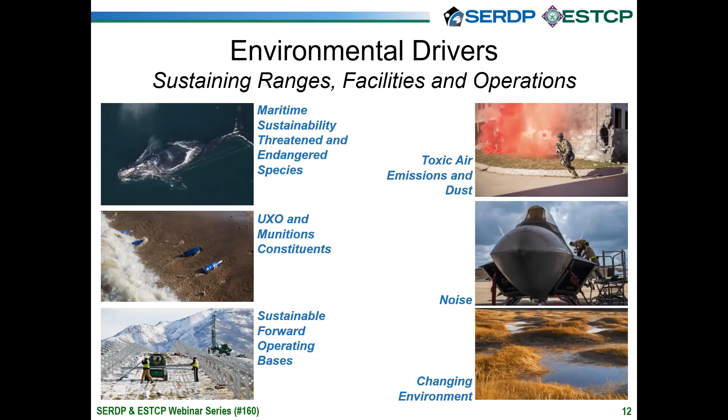We also are looking at reducing current and future liability. That can take the form of pollution prevention, where we're looking to eliminate hazardous chemicals of concern, or materials or processes, at our installations.

And then also we're looking at impacts from past practices. That could be impacts to our groundwater, soils, or sediments, and it includes some of our legacy chemicals of concern, as well as some of the emerging chemicals of concern.

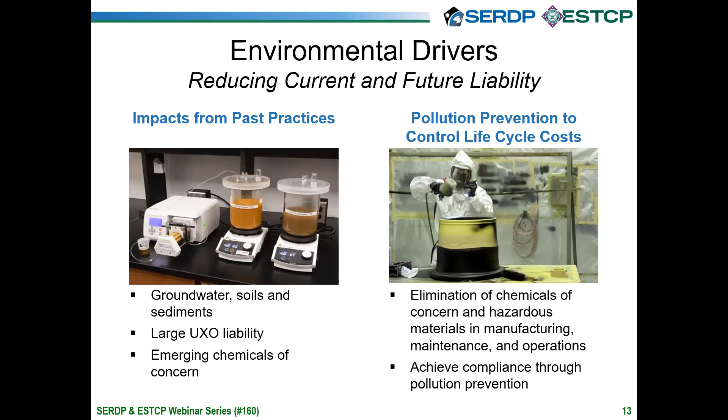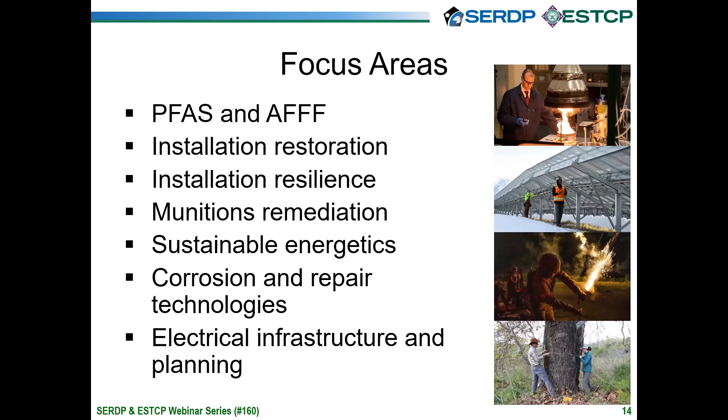Both of our presentations today will fall under this issue of reducing current and future liability. We have a number of focus areas, and you can see from this list they're pretty broad, everything from the top at PFAS and AFFF, down to electrical infrastructure and planning. Today our presentations will be addressing PFAS and AFFF.

The bedrock of our program is really on technology transition, and that is very critical to getting out the word on these successful technologies that we're funding under SERDP and ESTCP. We do this in a number of ways. If you go to our website, you'll find videos, guidances, and manuals on how to do things. We have an EnviroWiki that gives summaries of various different types of technologies. And then key to all of it are these webinars that we're watching today.

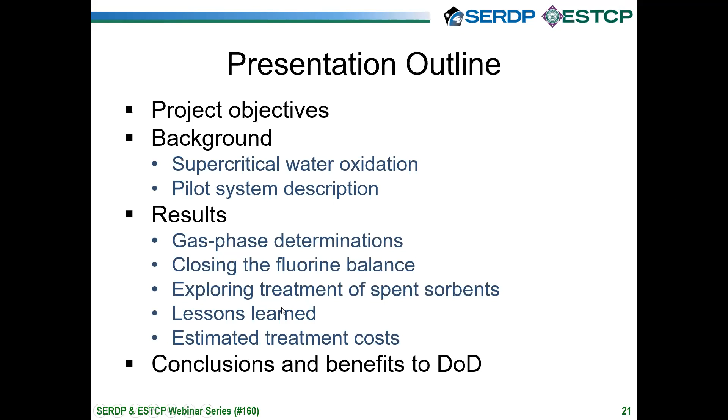This is the outline of my presentation. I'll go over project objectives, talk a little bit about background, explaining what supercritical water oxidation is, and describe our pilot system that is at Duke, and then go over the results, show you some detailed results, in particular closing the fluorine balance, and exploring other matrices, and wrapping it up with lessons learned, as well as estimated treatment costs.

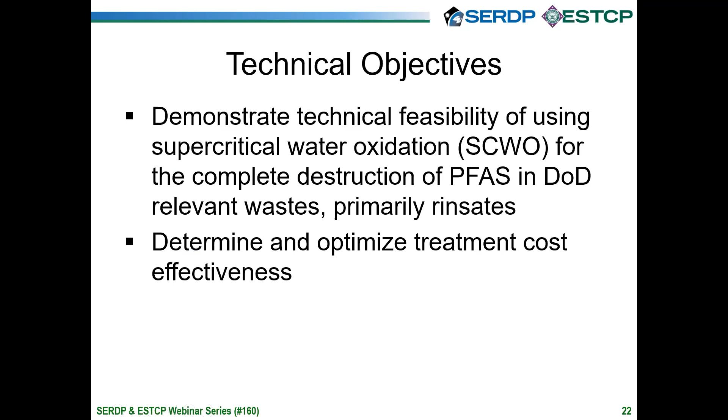The technical objectives for our ESTCP project are to show the technical feasibility of using SCWO for destruction of PFAS. We're focusing primarily on rinsates, but I will show you some results as well on other matrices. Then we determine and optimize treatment costs, have a determination of what it means at scale, and also prepare for technology transition.

So the demonstration elements include both treatability with a pilot, as shown here on the screen. This is our pilot SCWO system, doing some techno-economic analysis studies for understanding what the costs are, and technology transition activities. A lot of these are going through 374Water, but also we have an EnviroWiki, and have been very open about publishing and presenting.

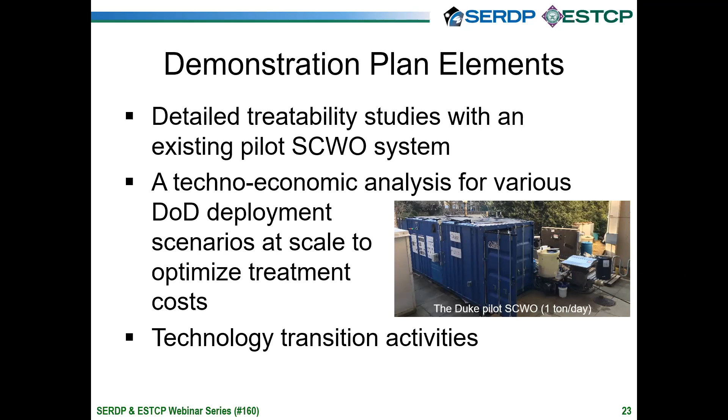So what is supercritical water oxidation, and what is supercritical water? We're all used to think that water comes in three forms: liquid, solid, and gas.

It turns out that if you heat and compress water to the extreme, above 374 degrees C or 705 degrees Fahrenheit, and roughly 220 times atmospheric pressure, water becomes supercritical. What does it mean? Well, it is neither a gas nor a liquid, but it borrows very interesting properties of both. It's semi-dense, has a specific gravity of roughly 0.1 to 0.3, and is extremely rapid heat and mass transfer water. But also it is a very reactive medium.

And what that means is that if you inject oxygen or another oxidant in supercritical water, the organics are going to be reacting really, really quickly, in a matter of seconds, and be oxidized to their most stable elements.

So the attributes of supercritical water are listed to the left here. Get very fast reactions. We mineralize all contaminants to CO2 and stable elements, and we call it waste agnostic. That means we can treat all kinds of co-pollutants, solvents, surfactants, chlorinated co-pollutants that come with the waste are all going to be oxidized without the formation of byproducts. We're not producing a secondary waste stream. And we can treat both liquids and we can treat slurries.

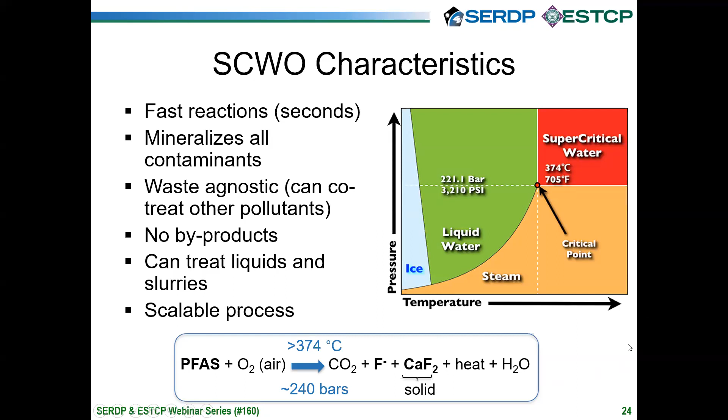Starting in 2013, the Gates Foundation funded a program in my lab to look at supercritical water oxidation for the destruction of fecal sludge in developing countries. And then much later, we realized it can destroy all kinds of pollutants, and this is when we did some trials with PFAS, and then later got ESTCP.

It is a continuous treatment system. Can treat about 1 ton a day or 265 gallons a day. As I mentioned, it uses air. It's a lot safer than pure oxygen, and it's fully computer controlled.

We have acquired a lot of expertise handling slurries, and that comes in handy with treating all kinds of waste, in particular suspension of ion exchange and GAC, and I'll show you a little bit more during my presentation.

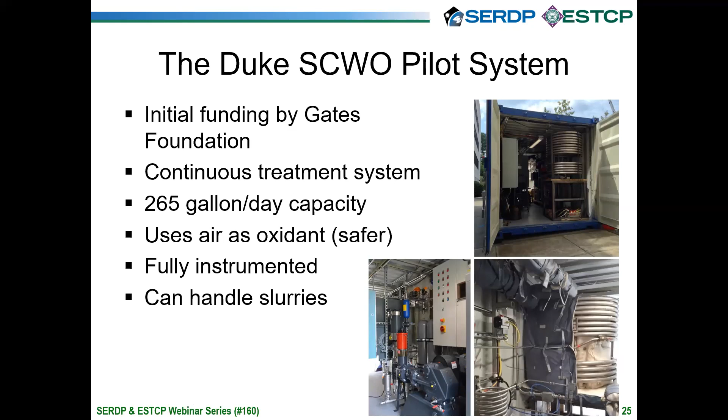And then within seconds, the supercritical mass travels through the reactor, which is just a long tubular reactor. The temperature increases, and all the supercritical water oxidation reaction happens. The treated waste is then cooled through successive heat exchangers. There's a final cooling, and then phase separation, like the permanent gases and then clean water effluent.

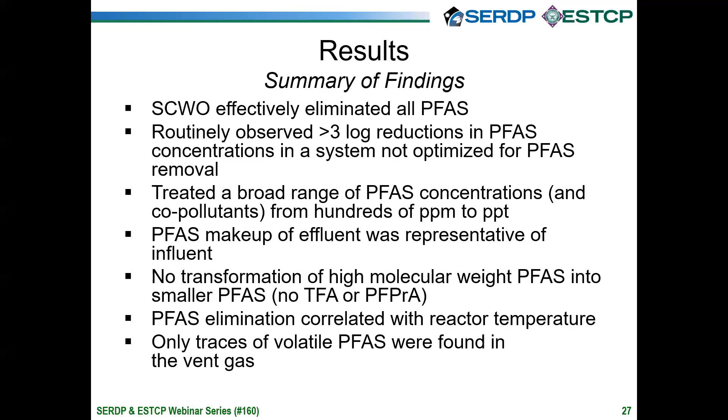There was no formation of HF. We control the pH in our system, and fluorine stays as fluoride in the liquid. There was no CF4. There was only traces of a few volatiles, and they're listed.

Pentafluoroethane being one, perfluoroheptane being another one, but the concentrations and the mass flux were really low. These were traces. In particular, I'm putting this number here, 0.2%. This is the fraction of the organofluorine that was fed to the system that was recovered or that ended up in the gas vent.

I stress here the fact that this is in a system that was not optimized for PFAS. So, thinking into the future for a system that will have a longer reaction time and further optimization for PFAS treatment, this number is likely to go further down.

I think this allows me to say with confidence, and we have the data to prove it, that SCWO does not emit significant amounts of volatile PFAS.

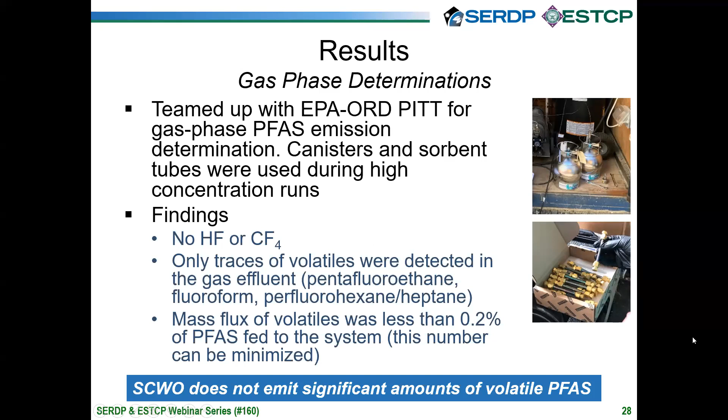I want to show you in the next few slides the proof that we're mineralizing the organofluorine to inorganic fluoride. We attempted to make fluorine balances on the larger system, but it was very difficult because there's a lot of nooks and crannies where fluorine, in particular precipitated calcium fluoride, can hide.

Therefore, we turned to a lab system. In the lab system, we call it the mini SCWO, is simply a high-pressure pump, a tube furnace, and the reactor in that furnace. We use an isothermal condition, and then cooling, and we can capture everything that leaves.

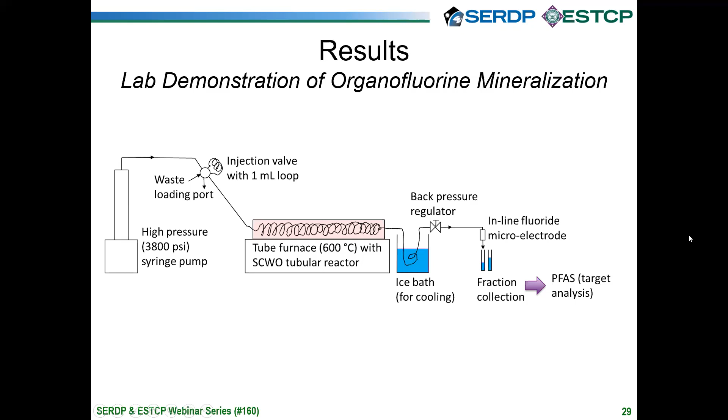Our approach here is to make injections of selected PFAS species, generally single species, and measure the fluoride coming out and compare the inputs and outputs. We can use this system as well for kinetic determinations to understand the kinetics of destruction of the specific PFAS.

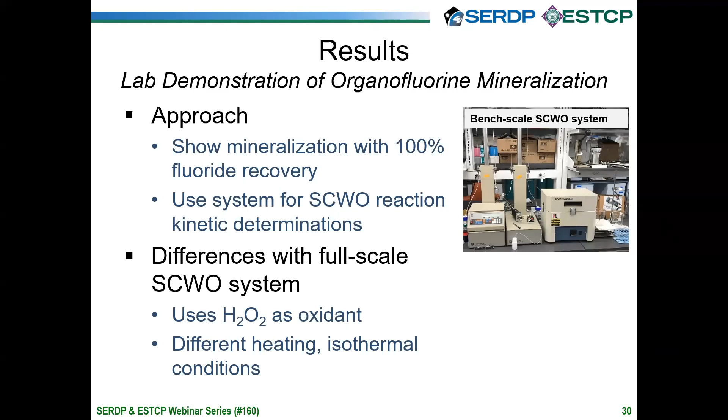There are differences, though, between this lab system and the large-scale system. In this small system, we use hydrogen peroxide as oxidant, but the hydrogen peroxide with temperature gets converted to oxygen and then acts. There's also slightly different thermal management and temperature profiles, so as we think about what these results mean for the larger scale, we need to be able to reconcile things such as reaction time.

Here's a typical result that I'm showing. I am reporting something we call the PFAS mineralization. It is the ratio between the fluoride that we recovered, the mass of fluoride, divided by the mass of fluorine in the PFAS injected. So when this is 100%, it means that every PFAS that was injected, every fluorine atom that was injected, is recovered as fluoride.

This experiment shown here is for 1 ppm PFOA at a constant temperature of 600 degrees. As a function of reaction time, we are reporting PFOA mineralization. What you can see, as we could expect, is that with increased reaction time, we're increasing the mineralization, and there's a point at around 35 to 40 seconds where we get 100% recovery as fluoride.

It's interesting that at the point where we don't have 100% mineralization, we also non-detect for all target PFAS that we analyze through our targeted analysis, about 40 compounds. No TFA, no PFPrA. What's probably happening is that we decarboxylate PFOA and produce perfluoroheptane, which is non-soluble and probably ends up in the gas phase.

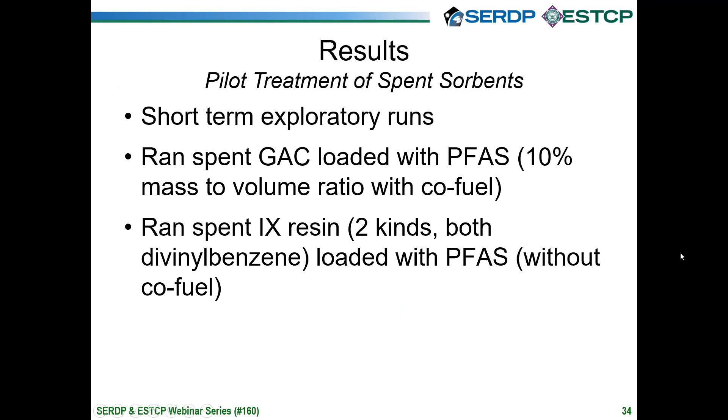I want to show you some results of the exploratory treatment of spent sorbent, because sorbents play an important role in treating, say, drinking water or low concentrations. These were short-term exploratory runs that we did, and we treated both granular activated carbon that was spent, so it was loaded with PFAS, and different kinds of ion exchange resins. Both of these were divinylbenzenes. They were all loaded with PFAS.

I want to be very clear here that we're not talking about regeneration or reactivation. SCWO fully destroys the resin or the GAC. So this is good for single use, and not reactivating.

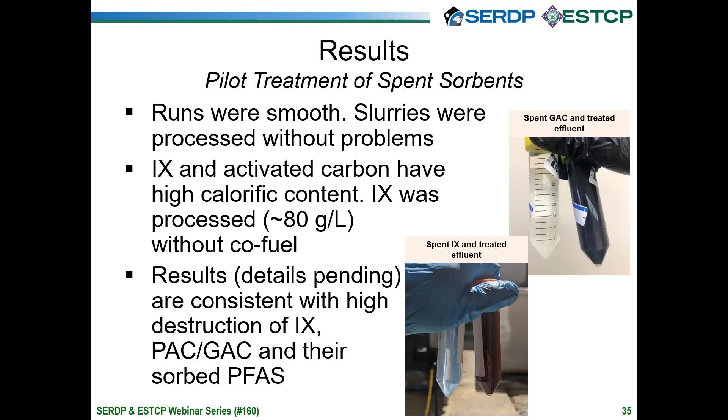So why is supercritical water oxidation so effective at destroying PFAS? Summing up here the scientific reasons for that. I mentioned earlier in my talk that supercritical water is a semi-dense or dense medium, and it's very reactive. If you look at the density of supercritical water, it's something like 350 to 1,000 times greater than the density of gas in an incinerator, because of the pressure and the lower temperature. It's this combination of temperature and pressure that really makes it more reactive. If you think about the collisions between the molecules at a greater pressure, there's going to be a lot more collisions between PFAS and water and reactive molecules.

Also, the presence of water is important here, and what it does is that it makes for very efficient generation of reactive species - to name a few, it's of course very complicated, but there's hydroxyl radicals and hydroperoxy radicals. Water also influences reactions such as the hydrolysis of carbonyl fluoride, which we know is a probable species formed in thermal processes.

And lastly, another reason is the properties of supercritical water itself. It has very interesting properties as a solvent - oxygen is fully soluble, and all organics are fully soluble. So we have a homogeneous phase that makes it so reactive. Those are some of the reasons why SCWO is so effective and so interesting as a technique.

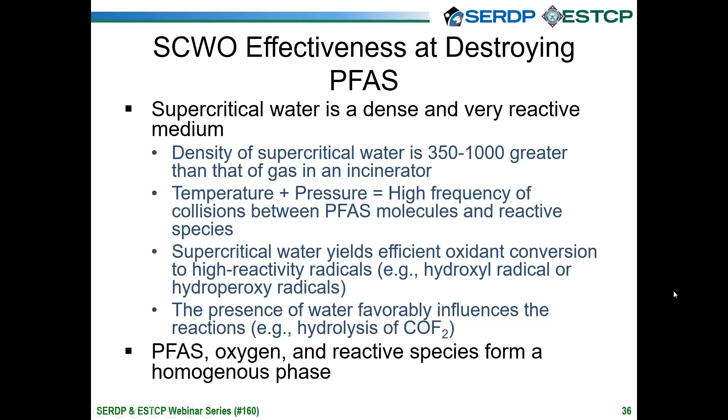So what are some of the lessons we've learned in our process, in our project? I get this question a lot: can we reach those low levels, current advisories or future MCLs? We have a lot of runs, a lot of data showing that we can reach the single digits, a lot of data showing non-detect.

So we're very confident in the ability to achieve multiple log reductions. Also, SCWO is a kinetic process, and what that means is that we know how to tailor the log reductions by changing the reaction time and the temperature, just as I was showing earlier on some of the experiments we did at the bench scale. So we know that we can tailor the conditions to a particular treatment endpoint.

Putting the last bullet point here, some folks have suggested that we could do multiple passes. If you want 7 log reductions, you pass your waste twice through the system. But I think it's an expensive proposal, and in my opinion, a longer reaction time through a longer reactor is better.

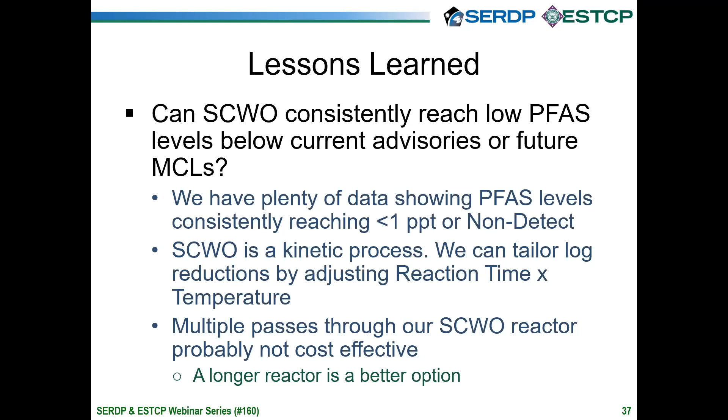There's special considerations needed when you try to do 5 log reductions or more. I'm showing here an example of why that is. If you take an extreme case of 1 drop of AFFF, 0.1 mil, it has a very high concentration of PFAS, 7,000 ppm. So if you have 1 drop that went through untreated, or that has some short circuiting, it has the potential to contaminate 10,000 liters, so 10 cubic meters, at the 70 ppt level.

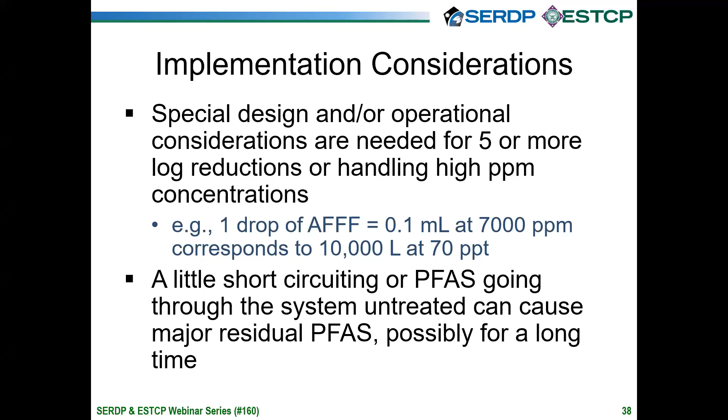Again, special considerations are needed for making sure that there's good treatment, that everything going through the reactor gets treated, that there's no short circuiting, and that there's nothing going through the system untreated, because a little bit of contamination can go a long way.

Energy balances. Energy is a big consideration for going to scale. I'm showing here numbers for the projections done together with 374 Water, considering different models for going to scale: 6 tons a day, or 6 cubic meters a day, which is about 1,600 gallons a day. Or if we think in terms of capacity for sorbents, about roughly 1 ton, and it depends on the sorbent and the condition.

For a system that can treat 6 tons a day, it would be 1 40-foot container, and that system would consume a little bit of power, about 10 kilowatts to 240 kilowatt hours a day. If you scale up, you benefit from economies of scale, and there's better access to energy recovery systems.

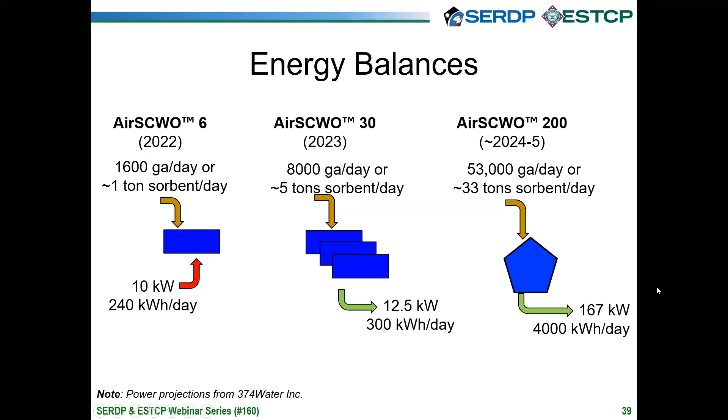The energy balance looks like this. It can actually produce power, not a lot, but something like 300 kilowatt hours a day. And for a much larger system, 200 tons a day, this would probably not be a containerized system, it would be a bespoke system, consuming or producing a certain number of kilowatt hours a day.

A couple slides on the economic analysis. Here I'm showing some estimated costs for rinsates. This is for waste that doesn't have much organic content, so it needs fuel added. I'm showing it for both the SCWO 6 and the 30, so 6 tons or 30 wet tons a day. You can see rough estimated prices for the purchase, and depending on the assumptions you're making, you might amortize this in different ways.

Operating costs here are separated, including the fuel cost as well as the manpower, maintenance and other costs. When you put it all together, at the 6 ton a day scale, it comes to about 77 cents per gallon. And at the larger scale, the fuel costs are significant here.

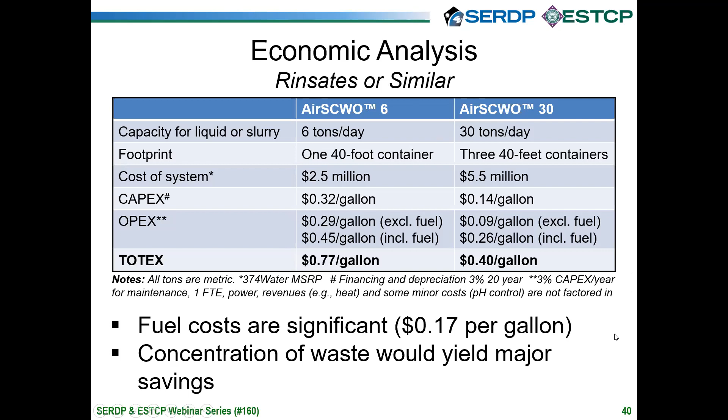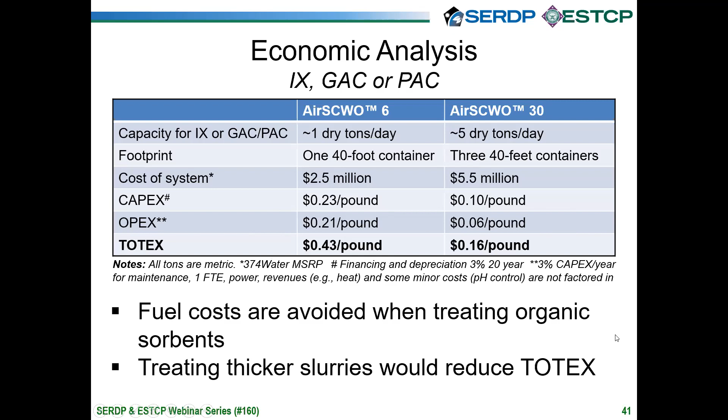So if you have another waste, a co-waste that can be added, it will yield some savings, or if you can concentrate the waste and treat a smaller volume. These are estimated costs for sorbents. The benefit here is that you don't need to add fuel. Based on the capacity, the estimated costs are about 40 cents, assuming 8,000 hours of operation a year, with the assumptions shown there. If we were able to treat it at a greater concentration, it would have further benefits.

So, putting it all together, what does it mean for you? What are the benefits to DoD? These are my conclusions. SCWO is a destructive treatment. We've shown that we can treat and mineralize all PFAS to fluoride, and this works for all PFAS precursors and co-contaminants as well. It's a kinetic process.

We know how to design it for the desired endpoint, and we can account for the fluoride. On a steady state, we can account for the fluoride and report and document destruction. SCWO is compact, it's a very small system, and it is scalable, and that's the reason why it's compact, because it's such a fast process. And we know how to handle slurries, so we can destroy solids directly.

So this is my contact information. Thank you for your attention, and I'm happy to take questions.

Great, thank you, Mark. To our audience, at this time please submit any additional questions using the Q&A box on your screen. Mark, we have a number of questions. The first is from the Army National Guard: Can you discuss where in the process the solids are removed? Feel free to go back to the process flow diagram in your presentation. Could you repeat the question - where in the process solids are removed? Yes.

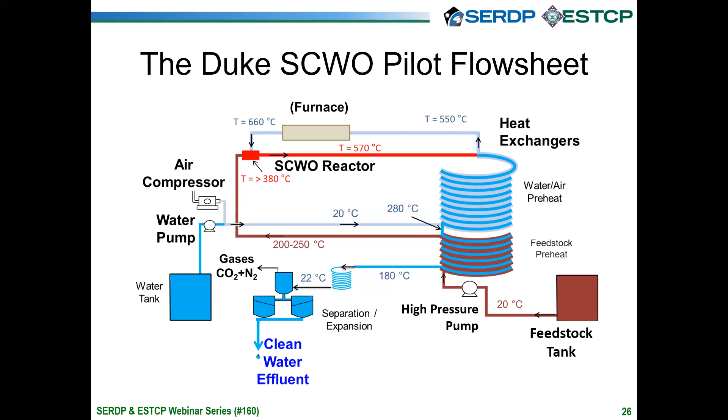Okay, that makes a lot of sense. Thanks, Mark. Next, can you talk about whether this system can treat actual AFFF, and what the range of those materials might be - like, could it treat the concentrated AFFF or the rinsate or anything else?

Yes. The highest concentration of AFFF that we've treated is 30-fold diluted. Some of these results have been published by Krause from the EPA - those tests were done in collaboration with them.

There are limitations to treating directly AFFF because it contains a lot of surfactants, so it's actually a supercharged fuel. Our current system was engineered to run on fumes, not a supercharged fuel, so we would have to dilute it - maybe about tenfold before we can treat it in the projected system.

But the challenges of treating AFFF would be pH control and salt control - inherently there are no limitations to treating AFFF directly. The fact that it has a high concentration of surfactant is actually a good thing, because it serves as the fuel I mentioned with the high calorific content.

And there's another question related to that about salt control - is there a concern about salting out, and if so, how is that dealt with?

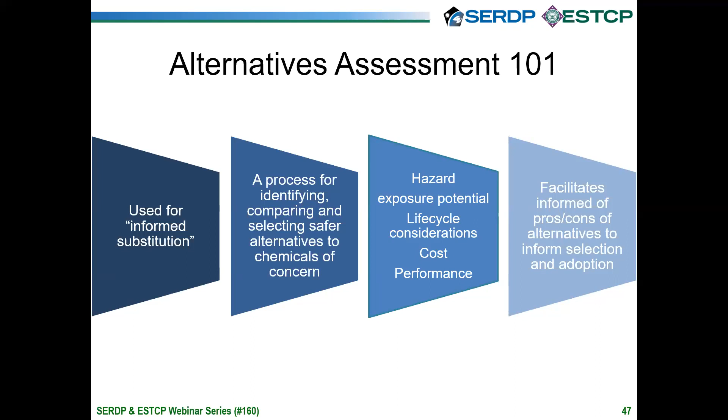That hazard and comparative exposure assessment, because we really want to understand a wide range of human health and ecological hazards, but also those trade-offs of exposure. Sometimes an alternative may either change the exposure profile from a concern from air to water. It may increase exposure. So we want to understand what those trade-offs are. Technical feasibility assessment, evaluating the performance against the needs established during the problem formulation phase, understanding the economic feasibility, but over the life cycle of a chemical product. And then other life cycle considerations upstream or downstream.

And then lastly, and often not thought about, is the decision-making phase. So once we identify and compare those various trade-offs, how do we make a decision about acceptable alternatives? And then how do we implement those? And when we don't have better alternatives, how do we drive research and development to design better alternatives? And I think the SERDP program has done a great job identifying research need for early stage new innovative alternatives for AFFF.

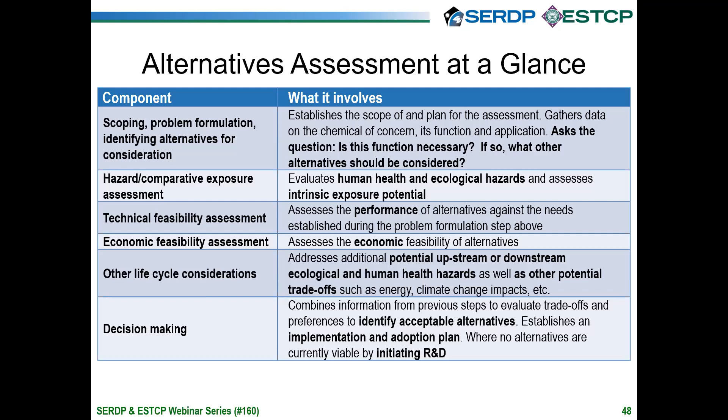So our overall arching project goals were really to accelerate the identification and adoption of alternatives that are safer for AFFF and PFAS products, to minimize regrettable substitutes. And really what we wanted to understand is, have alternatives assessments been done to date on AFFF? What have they said? How do we make better decisions regarding what are safer alternatives and what is sufficient performance? And then really understanding what's needed to support the adoption of safer alternatives. Ultimately, this project is really about creating the approaches and the knowledge and the methodologies to address other chemicals of concern for DoD and other agencies.

So first off, our first part of our project was to understand the landscape of existing alternatives assessments to AFFF. What we did was we sought to review existing assessments in order to understand their strengths and weaknesses to support improvements and future efforts ongoing. There have been a number of assessments on AFFF alternatives, from work on performance to hazard evaluation. However, we established criteria for what type of assessment could be considered a comprehensive alternatives assessment for this work.

Evaluations of alternatives were required to meet 4 criteria to be considered a comprehensive alternatives assessment and included in our review. They had to evaluate commercially available alternatives. They had to evaluate hazard, cost, and performance attributes, and if they did, exposure and life cycle, but those were optional. They had to use a standardized assessment criteria to systematically evaluate and compare alternatives to the incumbent, which is AFFF. And they had to include PFAS-free or fluorine-free alternatives and the incumbent product to support a comparative evaluation.

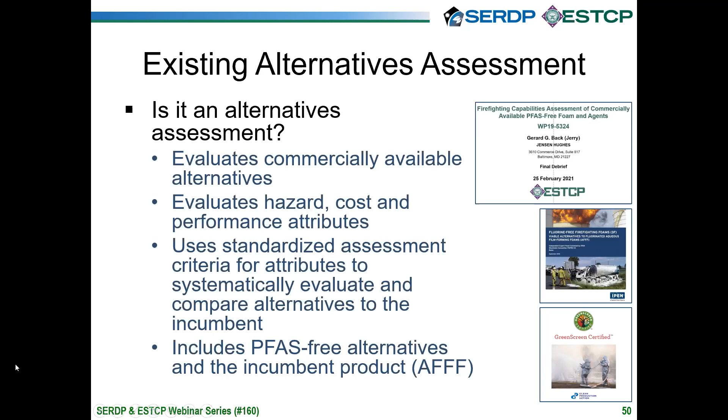So what we did was we looked through that literature and we identified that there was only one alternatives assessment that met all 4 of our inclusion criteria and was included in this critical review. It was an alternatives assessment undertaken by Wood to support the regulatory risk management options by the European Chemicals Agency. And although the data in this alternatives assessment was limited to information that third-party researchers were able to collect, which was highly dependent on voluntary compliance by industrial parties, the assessment was generally aligned with the approaches for alternatives assessment outlined by the NRC and IC2 frameworks.

We did identify several areas for improvements for future alternatives assessments on AFFF. Among them include a need to broaden the scope to not limit function to film-forming foams. In this alternatives assessment, only film-forming foams were considered. That may preclude different alternative processes or technologies that have the capacity to extinguish fires in a number of different scenarios, but do so by different methods other than the use of chemical surfactants or wetting agents.

The need to examine a broader set of hazard endpoints using measured and modeled data rather than solely safety data sheets. Safety data sheets often have limited data across hazard endpoints. So really trying to increase that number of endpoints to consider, including modeled and other actual toxicological data to support gaps in knowledge.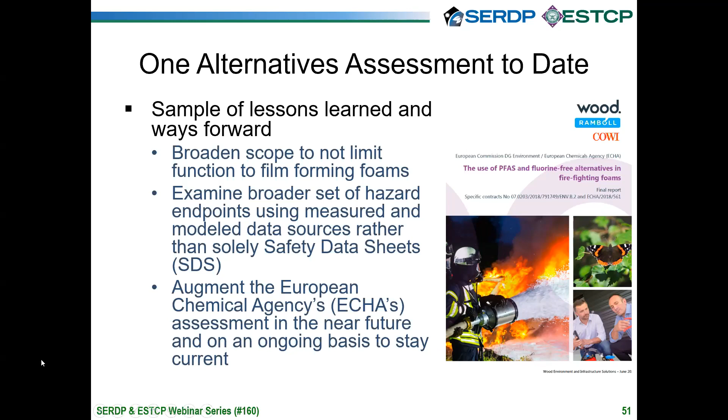And then ultimately, there's a need to augment the European Chemical Agency's assessment because of the rapid development of non-PFAS alternatives that's being driven by the NDAA state laws in the US and the European restrictions. So it's a very dynamic landscape for alternatives assessments, and these have opened the door to an abundance of alternatives. We want to make sure that those are considered in future alternatives assessments. Some of those have been created by the GreenScreen Certified standard for firefighting foam, as well as performance evaluations conducted under the SERDP and ESTCP program.

So the next part of our project was to evaluate what makes a safer alternative. There are several definitions, and often the lack of a definition of safer is a barrier to the transition to safer chemicals. So how do we think about what is a safer alternative? Currently, in the MIL spec, it only includes aquatic toxicity, a limited spectrum of aquatic toxicity and persistence. So we wanted to develop specific criteria to evaluate and determine whether alternatives are safer as compared to current PFAS-containing AFFF products.

Those decisions about whether a chemical is sufficiently safe for a particular use are often made through quantitative risk assessments, which can be resource intensive and require a significant amount of exposure data. These generally answer the question of whether an exposure level is sufficiently safe or acceptable, but they don't answer the question about whether a chemistry is intrinsically less hazardous or safer. So in alternatives assessment, we focus on comparing hazards, intrinsic exposure potential, performance, and cost to identify options that are safer and more feasible than the incumbent, with the overall goal of facilitating the informed transition to safer alternatives and minimizing the potential for regrettable substitutes.

When it comes to evaluating whether an alternative is safer than the incumbent, assessors use hazard criteria and metrics related to exposure potential and hazard. No alternative is likely to be benign. Safer rarely implies safe. A robust inventory of safe and sustainable chemistries and technologies that are benign to human health is currently unavailable for the vast majority of chemical functions and applications currently being served by chemicals of concern. As such, the best course of action is to use less hazardous or safer substances while we speed up efforts to develop and apply those safer and sustainable chemistry innovations.

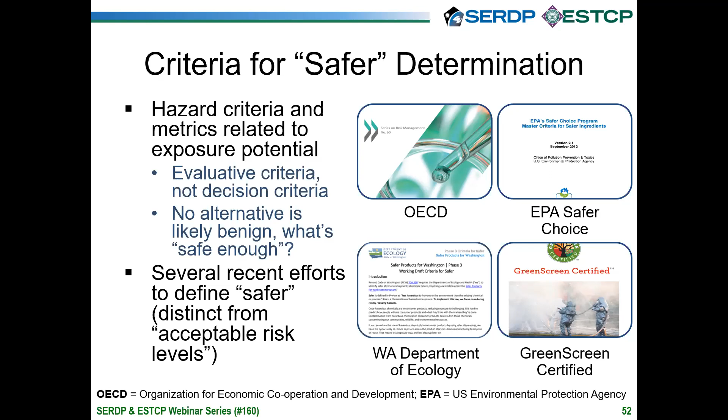Our focus really here is on establishing minimum criteria for safer alternatives. So we used both the OECD's minimum requirements and the GreenScreen Certified criteria as the baseline, and ideally we would go beyond that minimum set of criteria to have an increasingly comprehensive data set to make more informed decisions about those alternatives.

More data often indicates an increase in confidence in the safety of a chemical. So those minimum requirements need to be seen as the baseline in a broader hierarchy of criterion assessment practices that ultimately should provide stakeholders with confidence that a specific alternative is indeed safer. It doesn't provide ultimate confidence because scientific data is always evolving, but we use the best available data that can be modeled or created to solve that problem.

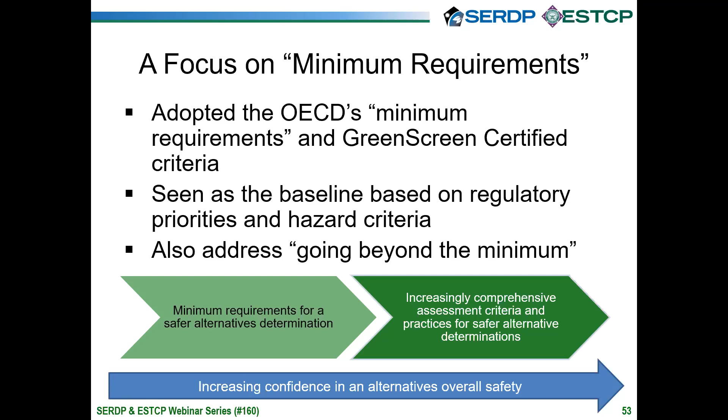So, criteria for safer alternatives. This is how we developed the minimum requirements for AFFF alternative determination. There are two parts to these requirements. Part A focuses on ensuring that potentially problematic classes of substances are not ingredients intentionally added, or impurities or residuals, in a safer alternative formulation.

A safer AFFF alternative cannot include fluorine, still the best metric for understanding that a formula is PFAS-free, the volatile cyclic siloxanes D4, D5, and D6 - known toxic chemicals recently classified as substances of very high concern in the EU under the REACH regulation - and alkylphenol and alkylphenol ethoxylates. These widely used surfactants are considered environmentally persistent, can range from toxic to extremely toxic to aquatic organisms, and can exert endocrine disruption effects.

But because aquatic toxicity is so critical given how these firefighting agents are used, it should be presumed that foams will be released into water bodies.

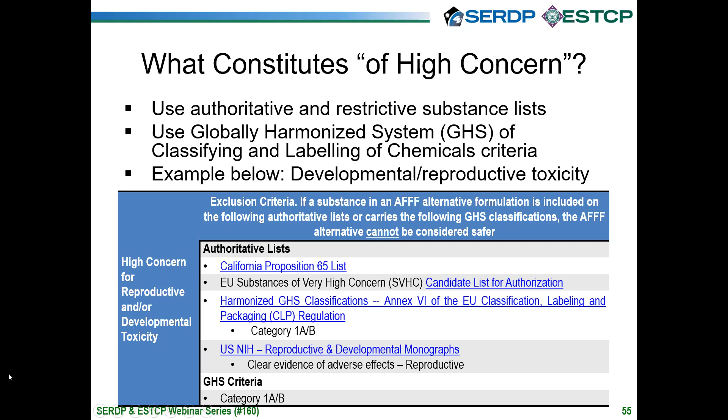Moving beyond the minimum is also important. This is where we might take the minimum criteria, but we would really want to know much more, particularly in the case of AFFF alternatives, wherever possible. So the guidance outlines additional hazard endpoints to consider beyond the minimum.

Of particular importance is the inclusion of mobility, which is being developed as a criteria for chemicals in the EU. Mobility is critical for chemicals that end up in water and is particularly of concern for AFFF and PFAS chemistries. The other would be endocrine disruption and skin and respiratory sensitization.

So let's jump to the next part of our project. In this one, we started looking at performance, because performance and lack of adequate performance is also often used as a reason for not switching towards safer alternatives. But it's also critical for agencies like the Department of Defense to ensure that decisions are made that ensure mission critical supplies of high performing alternatives.

However, performance can be a barrier if evaluations are based around a single best-in-class performance metric, require performance through specific mechanisms, or require consideration of adoption feasibility as part of the performance evaluation. Performance and feasibility are very different things. Whether an alternative can put out a fire is different than whether it can be applied in the current firefighting equipment.

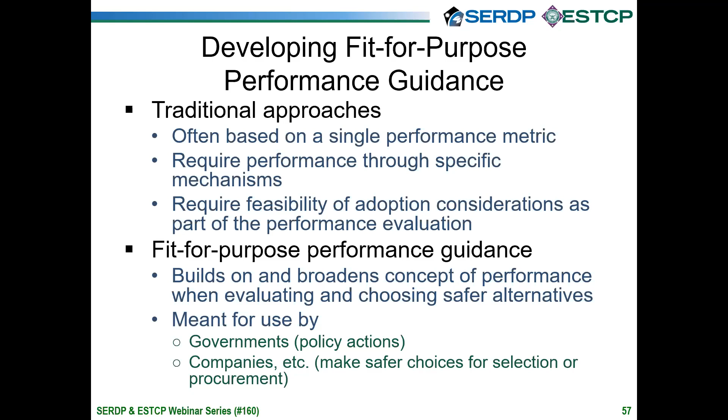So it builds on this and broadens existing approaches for evaluating alternatives. This approach underscores the importance of evaluating whether the function of the chemical, material, product, or process of concern achieves sufficient performance for the application. And it expands the thinking around performance as a range, and acknowledges important considerations around trade-offs with environment, health, and safety, where environment, health, and safety are considered a performance criteria equal to whether that chemical actually puts out a fire or whether it's cost effective. And this can hopefully inform companies and governments to support product design, policy, and procurement decisions.

So the overall goals here of a fit for purpose performance assessment are: select safer products, fulfill performance needs across a range of applications, minimize extended debates over performance, and expand the thinking and frameworks around what alternative solutions could be considered acceptable.

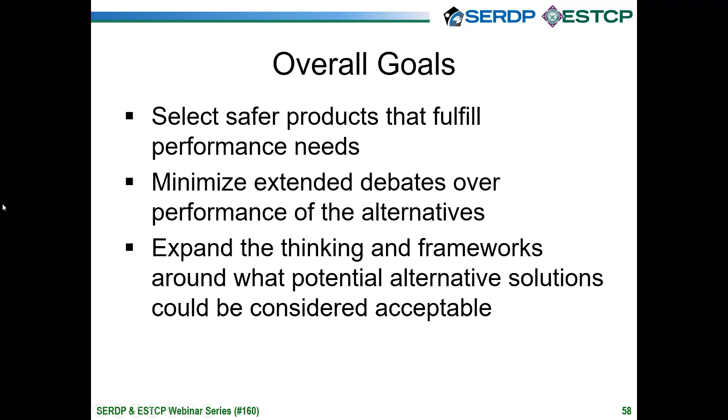We developed 6 guiding considerations in our fit for purpose performance assessment framework. The first is to determine the function of the chemical of concern for the particular application. So the first issue is understanding what is the function of the chemical. Is that function even needed? This is the concept that's been brought up as part of PFAS regulation in the EU around what's called essential uses. Is that function needed? In some applications it may not be needed, for example water repellency. In others it is needed. But really understanding that function to then understand alternatives is critical.

Secondly is defining application-specific use scenarios. So understanding what are the applications of firefighting foams, what are the specific applications, and what are the performance needs for those various applications. Then to develop performance standards independent of standards that are dependent on using a chemical of concern. So many of the performance standards were actually developed based on the actual chemical of concern. If we develop a performance standard based on hexavalent chromium, for example, nothing will ever work as well as hexavalent chromium.

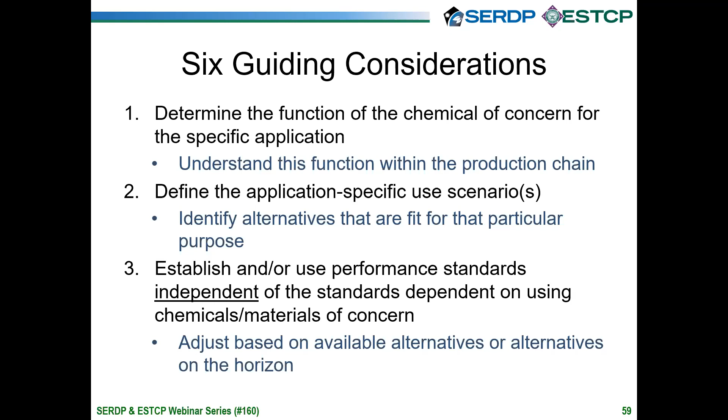So standards need to be based on the performance needs rather than a specific chemistry. We need to adjust those performance needs based on the available alternatives or those alternatives on the horizon. And then really understanding the range of standard or performance benchmarks - is the performance of a particular alternative inadequate, is it sufficient, or is it best in class? Because performance is always a range.

Sometimes alternatives really don't perform as well - they don't put out a fire as fast, or they allow burn back. Sometimes they do just well enough, but not as good as AFFF. And rarely is anything going to do quite as good as AFFF. Best in class, in a particular application, means these are the best ones you can have.

We want to consider technical performance separately from technical feasibility. So we want to understand and not discount alternatives simply because we don't want to switch our distribution equipment at this point. But maybe in 10 years, when that equipment ages and we're replacing it, we can think about something totally outside the box that puts out fires by a new mechanism. So we should think about those separately. Obviously technical feasibility will come into play - is it adoptable in the existing machinery, do we need to make significant changes?

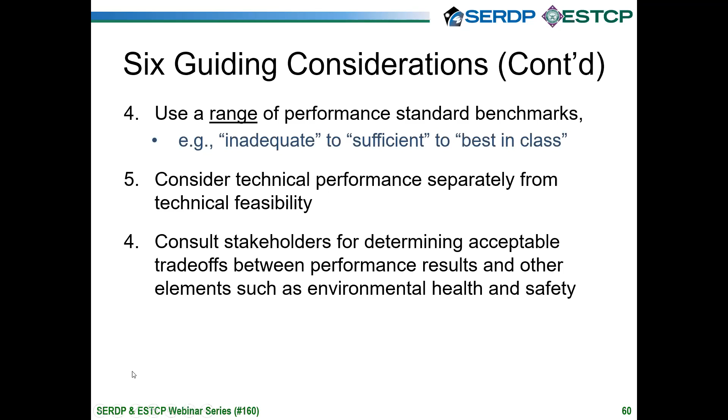And then lastly, we want to consult stakeholders more broadly in understanding what are acceptable trade-offs between performance and health and safety. So really understanding, putting on the table, what are those trade-offs, and how do we address those more effectively? Are there small changes to the performance that would address those health and safety concerns, or design changes, or mechanical changes, process considerations that could change?

So the last part of our project was really looking at the substitution process. In the end, it's all about whether those alternatives can be adopted. And what we found from many of our efforts over the last 20 years, looking for example at alternatives to phthalate plasticizers, or looking at alternatives to chlorinated solvents, is that implementation matters.

If we can figure out how to implement those alternatives - for example, in Massachusetts, we reduced the use of trichloroethylene by 95% in degreasing operations - really by focusing on the viability and the feasibility of alternatives for small and medium-sized companies, evaluating those.

So in the end, if we can make it work, adoption is really critical. You might have a better alternative, but if it can't be adopted, well, it's not a good alternative.

So if alternatives are available, there's a set of challenges. One, are they produced in sufficient quantities? Two, what are the investments in changes in equipment and training? Three, are there new regulatory approvals to get those alternatives across the finish line? Fourth, are there customer approvals or certifications needed? And lastly, what do we have to change in the way we manage those chemicals from a health and safety perspective? Let's look at some of those challenges.

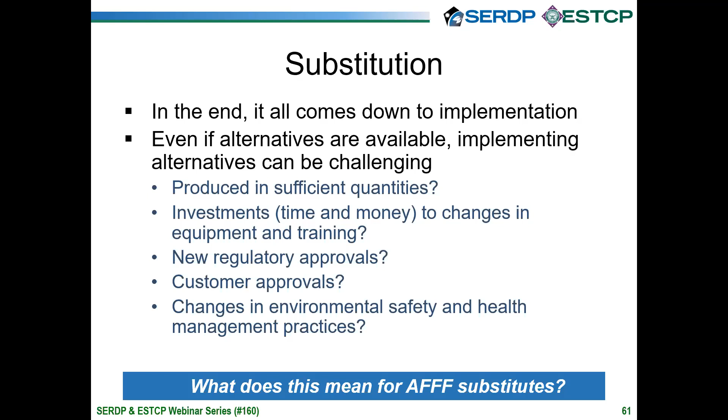What we did was a series of interviews with experts in the field to understand what were the key challenges, including performance bodies. What are the key challenges or inhibitory factors to the transition? And what are the most important enablers to the transition to safer alternatives to AFFF?

In the end, we did the interviews, both domestically and internationally, with stakeholders involving fire suppression experts, procurement experts, defense agency experts, alternative product developers, fire marshals, emergency management agencies, state environmental departments, and airport firefighting personnel.

We did a review of the literature, including peer-reviewed publications and reports in the gray literature, and then we delved deeper into some of the topics that emerged in the interviews and in discussions during SERDP and ESTCP meetings.

So we identified five key inhibitory factors that are serving as barriers to an effective transition, and those include transition costs.

Although the purchase price of F3 alternatives is cost competitive, replacement costs related to equipment, decontamination and disposal costs may be significant, as well as training.

There's a lack of knowledge of performance for specific real-world scenarios, so proof of concept or demonstration level performance tests of F3 alternatives are simply not enough to give assurances to some users that the alternatives will work as needed in actual firefighting circumstances. Substitution regret.

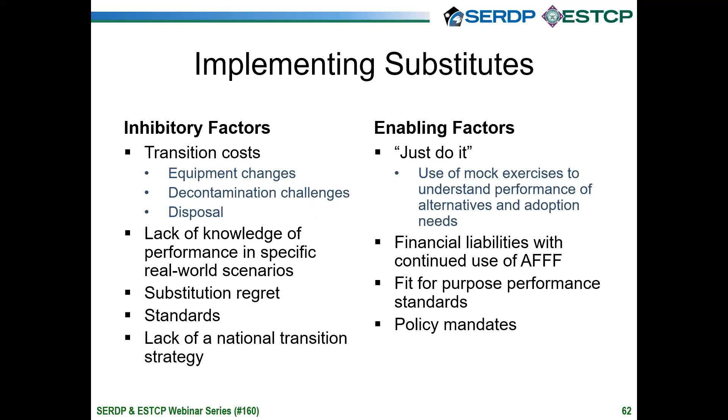So let me end with conclusions. What we found was that evaluation of PFAS-free AFFF products will benefit from a comprehensive alternatives assessment approach to evaluate trade-offs against multiple attributes. Those minimum requirements for safer alternatives need to align with regulatory priorities in the US, EU, Canada, and other jurisdictions to support safer and feasible substitution.

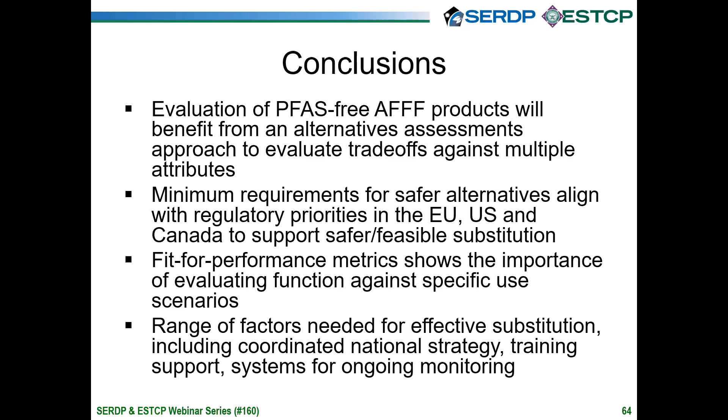That fit for purpose metrics show the importance of evaluating function against specific use scenarios. Expecting that one alternative will meet every application like AFFF is probably an unrealistic expectation - we need fit for purpose options. And then a range of factors are needed to ensure effective substitution, including a coordinated national strategy, training support, and systems for ongoing monitoring.

The benefits of our work for DoD are really to show how the alternatives assessment approach can support informed substitution and accelerate the transition to safer alternatives while avoiding regrettable substitutions.

That we can elevate aligned criteria and clear criteria across chemical types to support decisions about what is a safer alternative. And that needs to be clear to the marketplace and to the regulatory community.

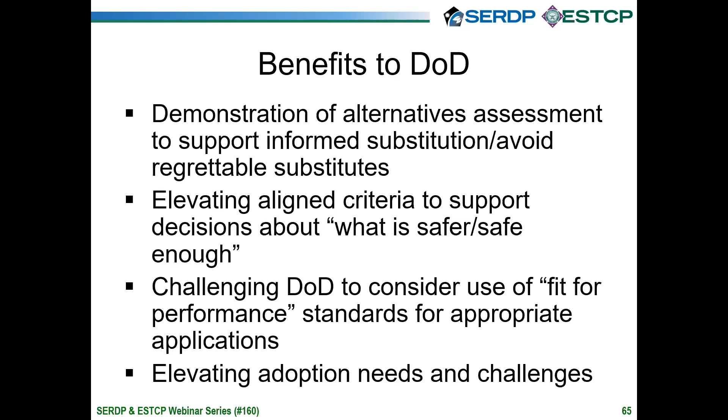Our project challenges DoD to consider use of fit for purpose performance standards for appropriate applications, and it really elevates the need to focus on adoption and ensure that those challenges and needs are addressed as we transition to safer alternatives.

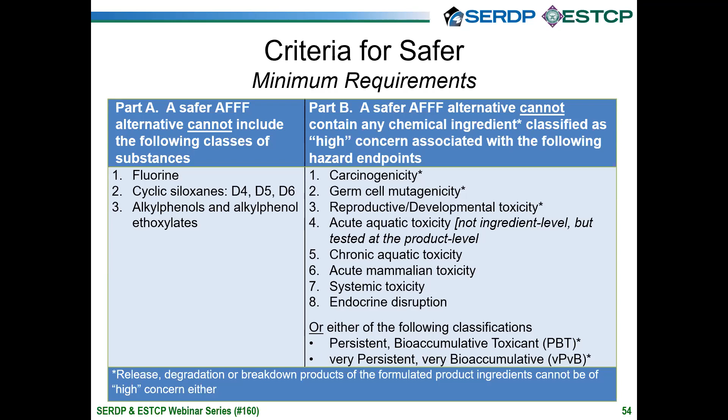Next, can you talk about to what extent DoD is using fit-for-purpose guidance, or alternatively, how could DoD implement fit-for-purpose performance assessment in practice?

I believe in some applications DoD is starting to think about this, but it's a new way of thinking about chemical alternatives. Typically it's been looking at a single standard, and it may be useful to think about different standards depending on the application. In one application, a set of alternatives may be sufficient; in others, it may not be. I believe there are examples of different specs that DoD has developed depending on the application, and it's really taking this to a greater degree. We can see this in other challenging areas, moving away from specific chemicals to more of a broad range of performance, and maybe Dr. Nissen can weigh in on the Q&A about that.

Joel, can you tell us the most critical additional work that is needed to support decision-making, specifically for the transition to safer alternatives for AFFF?